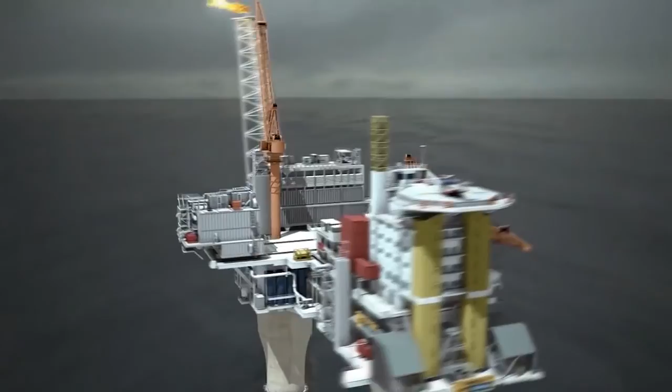Our lives depend extensively on the lifeline of progress, sustained by invaluable natural resources. Of course, it takes cutting-edge technologies to process these natural resources.

One company is at the leading edge of oil and gas process technologies: Heurtey Petrochem, an international oil and gas engineering group that is now a world leader in process furnaces for refining, petrochemicals and hydrogen production. With its inception in 1953 in Paris, it has extended its arm globally with subsidiaries in India, Romania, Russia, China, Korea, USA, South Africa, Middle East and Malaysia.

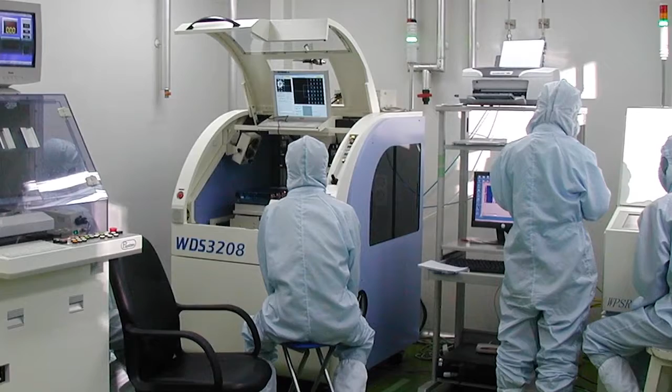It is backed by strong R&D facilities of IFP France, and has successfully completed 60 years of operations serving the oil and gas industries worldwide.

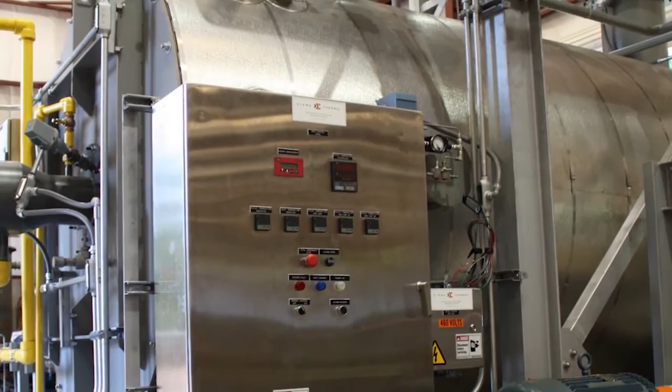The company established its first footprint in India in 1987 with an assignment of 3 indirect fired heaters for Gas Authority of India Limited. This was followed by an EDC cracker unit for Finolex and a major contract of 12 heaters for Reliance in 1996.

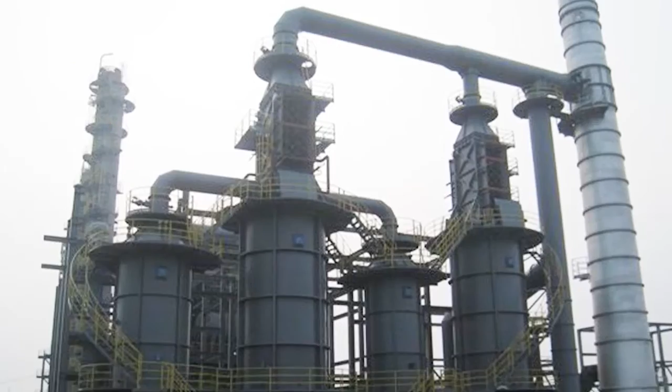It also bagged contracts for heaters of crude distillation units, vacuum distillation units and FCC unit from Essar. Sensing tremendous opportunities in India, Heurtey Petrochem set up its base here in 2004 when it bagged the Reliance Jamnagar project.

The project involved engineering, supply and erection of 28 fired heaters with a power volume totaling 658.74 megawatts, almost equivalent to 2 power plants.

The Heurtey Petrochem Group has been serving the refining and petrochemicals industry all across the world for 60 years. Due to the size of the country and its fast-growing economy, it was quite natural for us to establish ourselves in India, and today Heurtey Petrochem India has become one of our main centers of excellence for engineering, procurement and project management.

Our Indian colleagues, due to their high level of skills and their dedication to the projects they undertake, have been developing a very impressive track record of successful projects in India and abroad. I'm confident that in the coming years they will continue to serve our customers in and outside the country with the highest standard of safety and quality which our group is internationally recognized for.

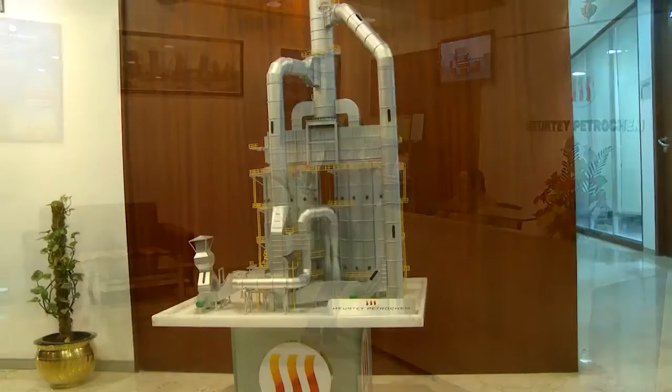In India, Heurtey Petrochem has made tremendous progress in a very short period of time, winning contracts of significant value from Tata Chemicals Babrala in 2007, and then from Chambal Fertilizers Gadepan and even Indian Oil Corporation Limited Vadodara.

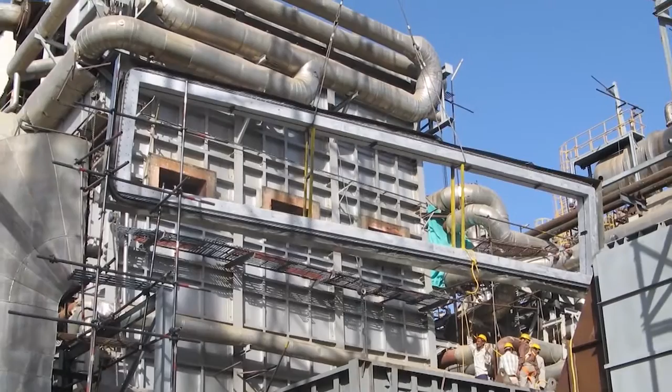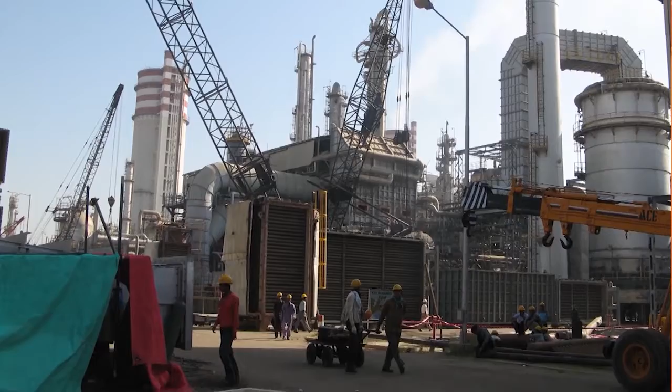The assignment of the Gadepan plant was spread across 2 phases, wherein Heurtey Petrochem replaced the old air preheater and old ducts with duct burners, convection modules and coil repass. In the second phase, it executed the job of coil repass. Both jobs were completed with shutdown periods of 21 and 10 days respectively.

At IOCL Vadodara, it won the turnkey project for the steam methane reformer package as part of their residue upgradation project. The task included erection using the services of a local fabricator, since shipping the 7-meter wide boiler would have been quite a difficult task.

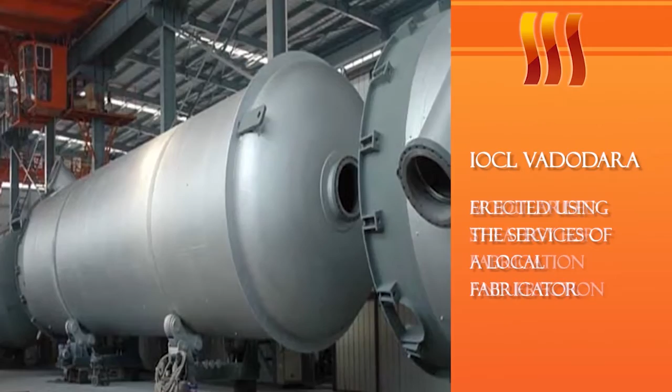Heurtey Petrochem used a modularized strategy for fabrication and erection of reformer components so as to reduce man-hours. During 2008, Heurtey Petrochem bagged an order of VGO HDT heaters apart from naphtha superheater for the same plant. Significantly, all tasks were completed within their contractual periods.

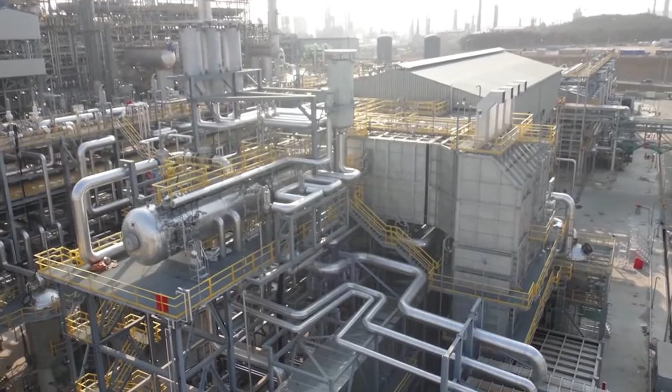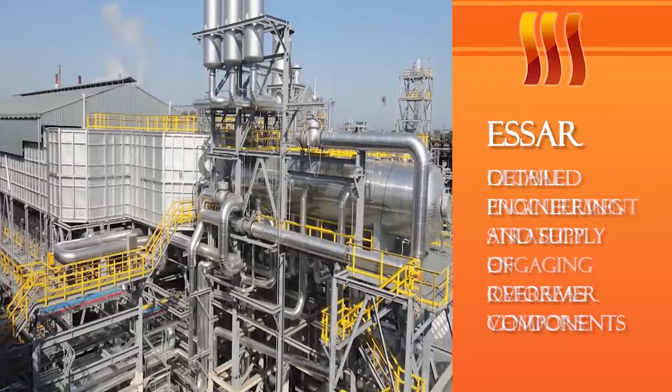In the same year, Heurtey was awarded the assignment of a steam methane reformer package of 130,000 Nm³ per hour hydrogen plant from Essar. The task involved detail engineering and supply of reformer components, and since the delivery time was very stringent, the team adopted a global procurement strategy, engaging overseas vendors as well.

Satisfied with Heurtey Petrochem's professionalism and quality, Essar handed over another project involving detail engineering and supply of 2 DHDT heaters in the same year.

Heurtey Petrochem again bagged orders of fired heaters at the Greenfield Refinery project of IOCL Paradeep in 2010. It set a successful benchmark with its high level of management skill set in the backdrop of a very demanding socio-economic, logistically challenging environment. It successfully installed the coker heater package for one of the world's largest coker units. It also fabricated VGO and DHDT heaters and was the first contractor to erect these on-site at IOCL Paradeep.

To add further to its credits, Heurtey Petrochem bagged the revamp order at Reliance Patalganga. The scope included detailed engineering and mechanical supply of new convection section, supplied with refractory lining in pre-dry-out mode, which drastically reduced the startup time.

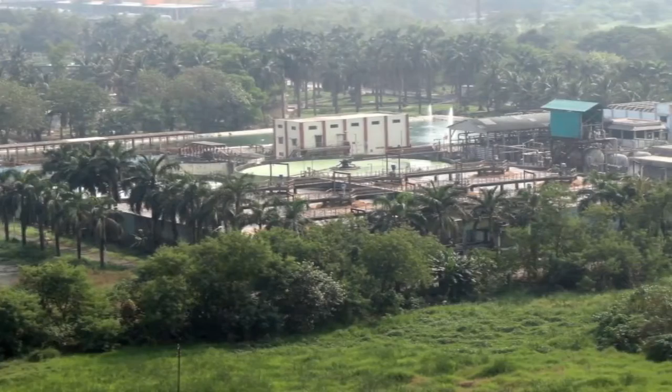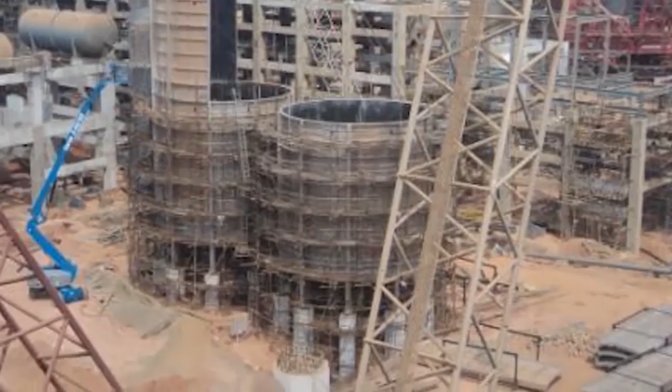In the same year, Heurtey Petrochem did the modification of NG preheater coils at the RCF Thal fertilizer plant within a shutdown period of 15 days, managing to increase the coil passes from 4 to 8. It also bagged a 5-heater project from L&T, an engineering giant, at the Mangalore Aromatics Complex Unit in the same year.

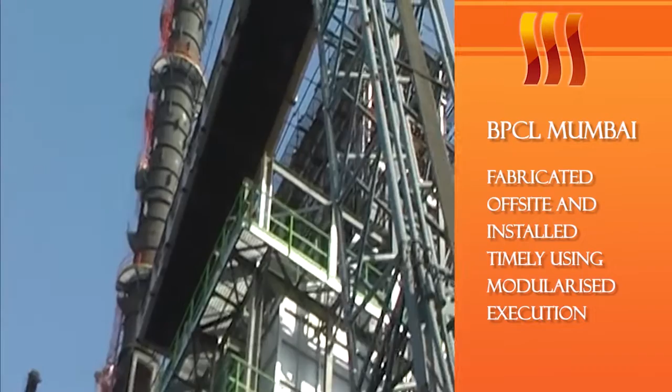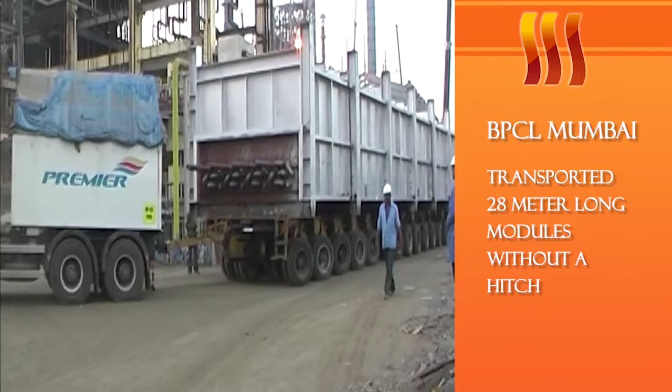In 2011, Heurtey Petrochem bagged an order for NHT CCR heaters from BPCL, Mumbai. Using modularized execution philosophy, it fabricated the heaters off-site and installed them within the stipulated time. The critical phase was transportation of 6 convection modules, each 28 meters long and 5 meters wide. Erection was carried out in the operational refinery, complying fully with the refinery's work regulations.

In 2012, Heurtey Petrochem was awarded the contract for engineering and supply of a hydrogen manufacturing unit of 130,000 Nm³ per hour from SRL. The major challenge was to commission the task within 12 months, and Heurtey delivered.

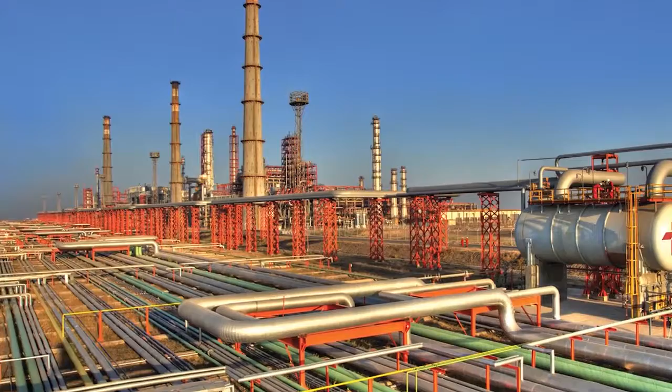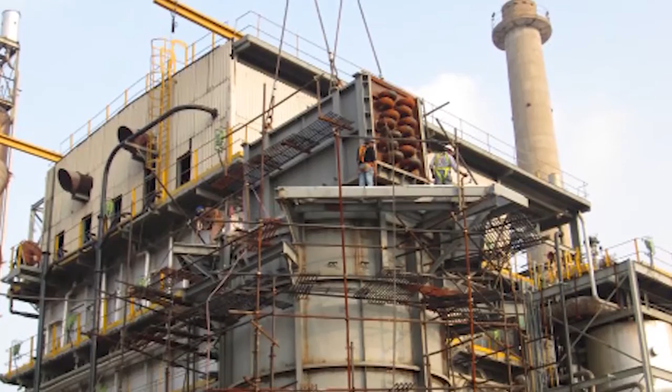In the same year, it won the order for Reliance EDC cracker projects. The fabrication was done at the workshop and installed on site. Further, in the second half of 2012, it bagged an order for a coker charge heater from Reliance for its DTA complex. Another order for a heater for Kanpur Fertilizer and Cement Limited was placed with Heurtey, successfully executed within a very short period of 9 months.

Recently, Heurtey Petrochem successfully bagged an order for 6 paraxylene heaters from RIL Jamnagar, Gujarat, having a combined heat duty of 293.94 Gcal per hour. It has also been awarded a project for a delayed coker heater from Chennai Petroleum Corporation Limited with a heat duty of 70 Gcal per hour.

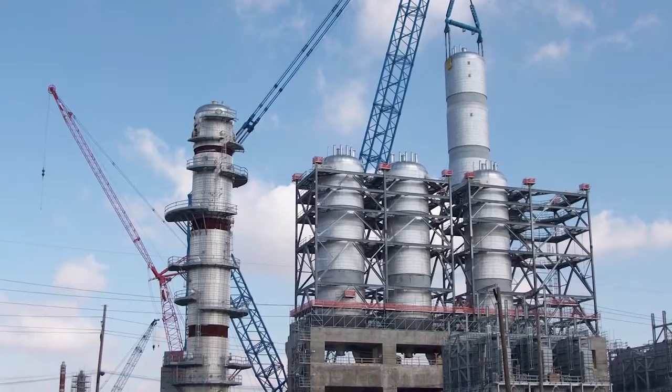Backed by the group, the Indian office of Heurtey Petrochem also managed to win critical projects from across the borders. In 2006, it fabricated and supplied 12 vertical fired heaters at Sohar Aromatics, Oman. It also supplied 2 fired heaters to ABB Shell in Singapore the same year. The heaters for Sohar and ABB were fabricated at the L&T Kanchipuram yard and exported through Chennai port.

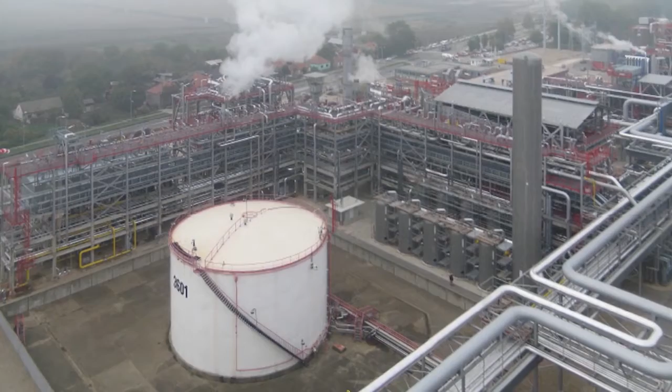In 2007, it supplied 3 box-type fired heaters to SEI Sinopec, China, through its fabrication units in Romania and Malaysia. In 2009, Heurtey Petrochem India made a significant contribution when Heurtey Petrochem France bagged an order from NIS Gazpromneft for a complete hydrogen generation unit of 77,000 Nm³ per hour, based on Haldor Topsoe technology, on an LEPC basis.

Heurtey Petrochem India has been constantly supporting its subsidiaries for major assignments worldwide, and also plays a vital role in the group's successful business growth, wherein its role is well appreciated by very satisfied Indian and global customers.

Heurtey Petrochem India, since its inception in 2005, has been actively participating in various public and private projects across refining, petrochemicals and fertilizer sectors in India. We are growing from strength to strength since 2005, and today we are 170 personnel dedicatedly working on EPC projects in India.

Having successfully executed projects with all the major clients in refining, petrochemicals and fertilizer sectors, has placed Heurtey Petrochem India in a leading position in a very competitive and dynamic Indian market space. We are today a well-integrated EPC company, offering optimal EPC solutions, and nicely positioned to contribute towards the growing Indian economy in related market segments.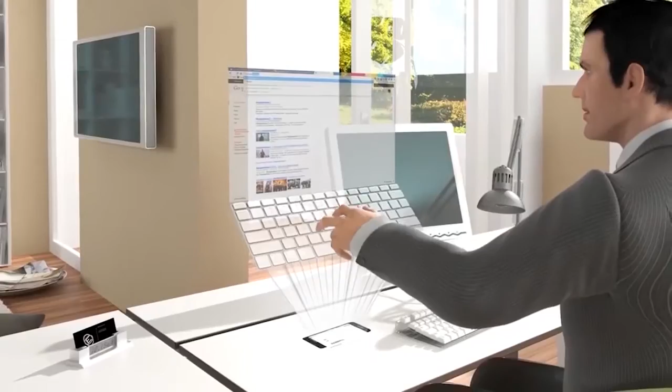These trends will be key driving factors for Heurtey Petrochem India to emerge as a successful player in India in the near future. The future, they say, belongs to those who innovate today, and Heurtey Petrochem is way beyond its times.

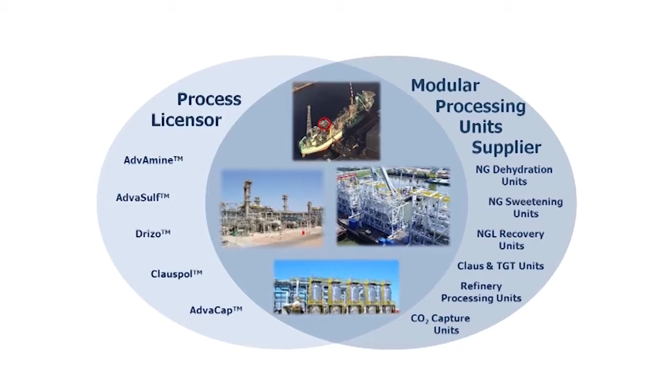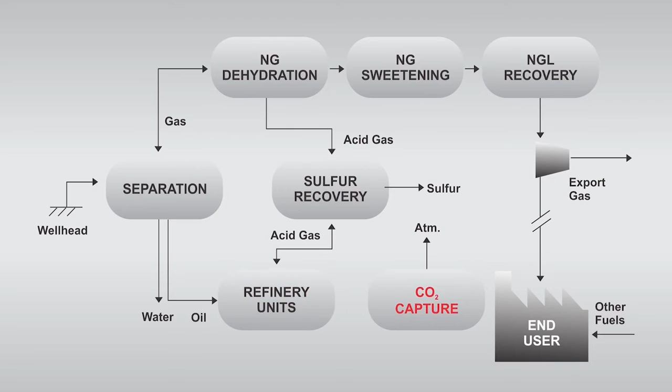Heurtey Petrochem is also recognized for its unparalleled expertise in natural gas treatment through its group company Prosernat, a renowned company in supplying equipment and licensing business in the upstream and downstream sectors of oil and gas. It has been supplying equipment like NG dehydration units, NG sweetening units, NGL recovery units, Claus and TGT units, refinery processing units and CO2 capture units, and providing technologies like Advamine, Advasulf, Drizo, Clauspol and Sultimate, among others, to the oil and gas industry for over 30 years.

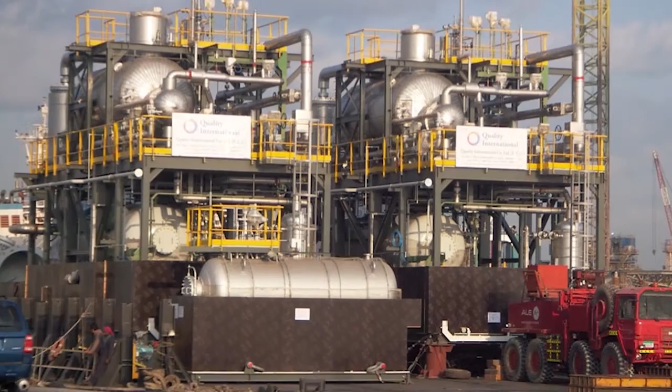Right from technology selection and process licensing to supply of complete turnkey units, Prosernat covers all disciplines of engineering, namely process, mechanical, instrumentation, electrical, automation, procurement, project management and technical assistance.

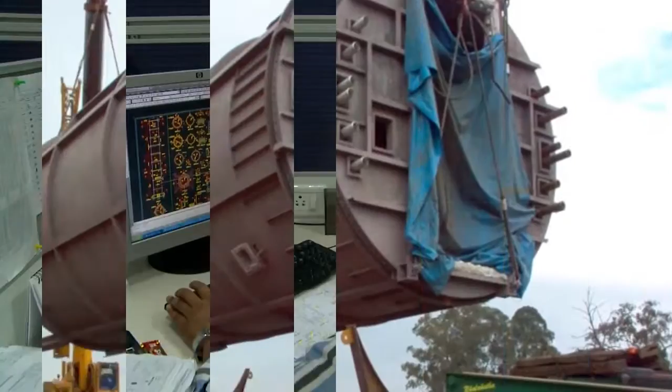Heurtey Petrochem's success comes from its endeavors to provide only the finest. To this end, it has invested heavily in research and development of technologies and support systems. Its core areas of R&D include optimization of furnaces for new and existing processes, modification of furnaces for oxycombustion with a view to carbon capture, and also hydrogen production.

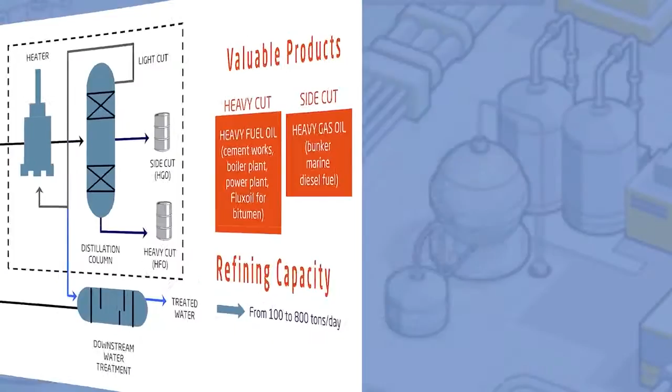Its R&D forays also include environmentally sensitive issues. Through its P2R concept, it has innovated a clean and economic solution to seaports, industries and ship owners, and thus participates actively in the reduction of marine pollution risk. The concept involves recovery of oil residue from seawater and upgrading it into valuable recycled distillate, with sustainable environmental improvement by means of a distillation process.

As an environment-friendly organization, Heurtey Petrochem complies with various environmental codes and standards. It focuses on noise limitation by blending ceramic fiber with concrete in the construction of furnace walls and by proper muffling of air intakes. It also takes measures to ensure limitation of CO2, SOx and NOx emissions.

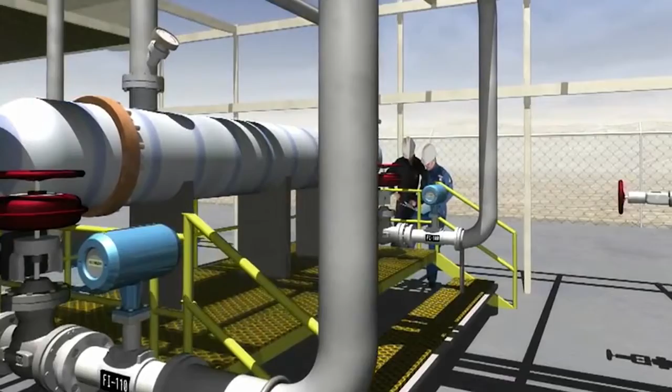Little wonder, Heurtey Petrochem is a preferred solutions provider for most oil and gas corporations in the world. Today, Heurtey Petrochem India is all set to take on the tomorrow.